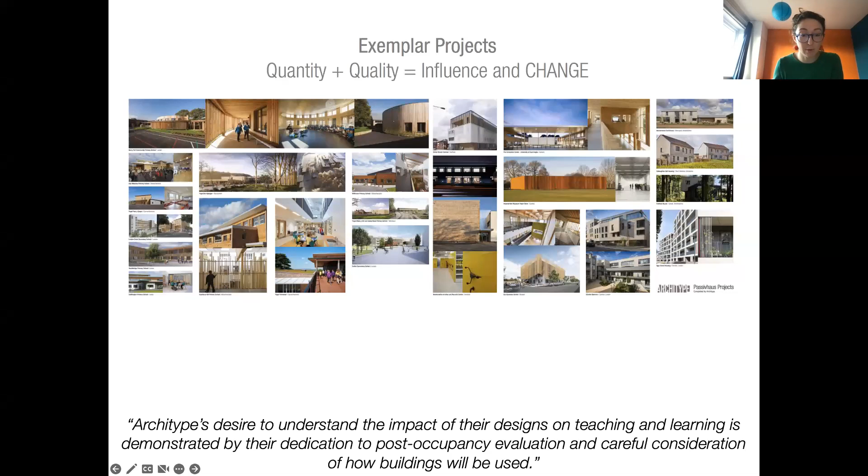So integrated design to us is about getting the basics right from day one, using an environmental approach from the outset, and thinking about the services and structural strategies from this early stage as well. Keeping it simple. If it's not simple, it's hard to build and to build right, harder to maintain, more costly, both in terms of money and also embodied carbon.

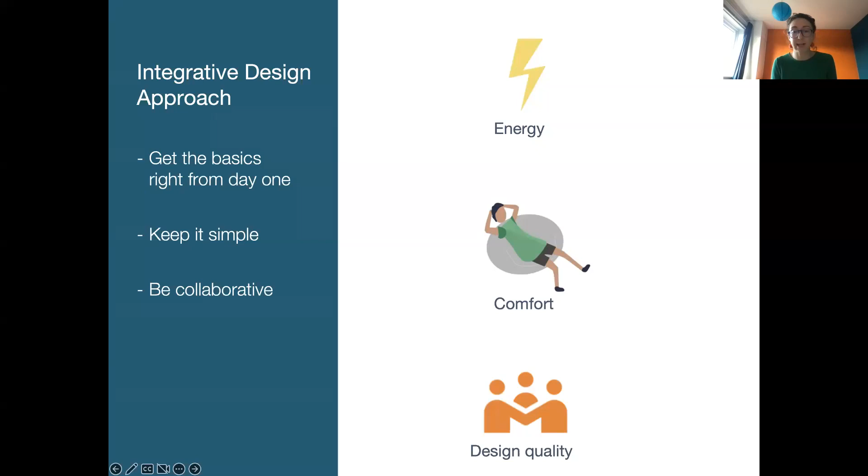And working collaboratively from the early stages with a good and experienced design team and contractor team is also really important. We don't feel that buildings are about any one company or person's ego, it's a team effort.

So just expanding on that comfort point slightly, as this is often something which is not necessarily always thought about, the comfort of occupants has a huge impact on how they experience a building. And as now people spend most of their time indoors, it can also have a huge impact on their health, which is why we think it's so important.

So by comfort, we're meaning air quality, including CO2 levels, particularly important in learning environments, the air temperature swings, overheating, as well as acoustics, moisture and mold control.

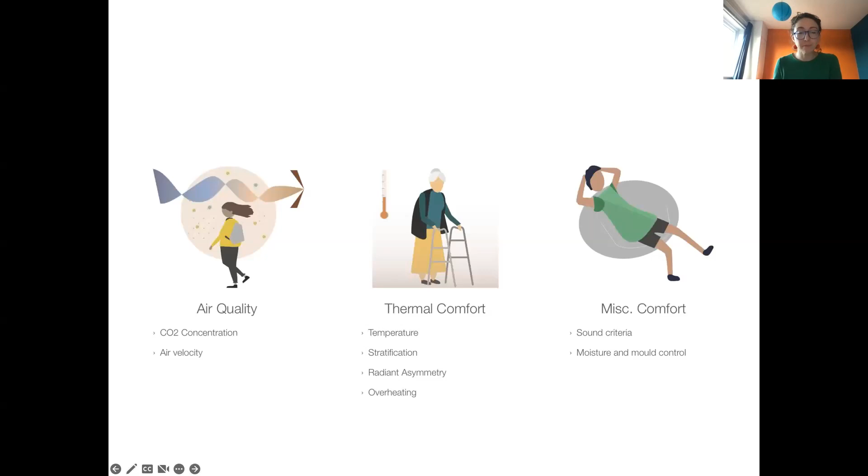So I'm going to talk briefly about the evolution of our design process at Architype. I don't know if you've all heard of the performance gap. So according to CIBSE, on average, buildings use 5 times as much total energy in reality than when predicted at design stage. In fact, that's up to 24 times the amount for heating. And that difference is called the performance gap.

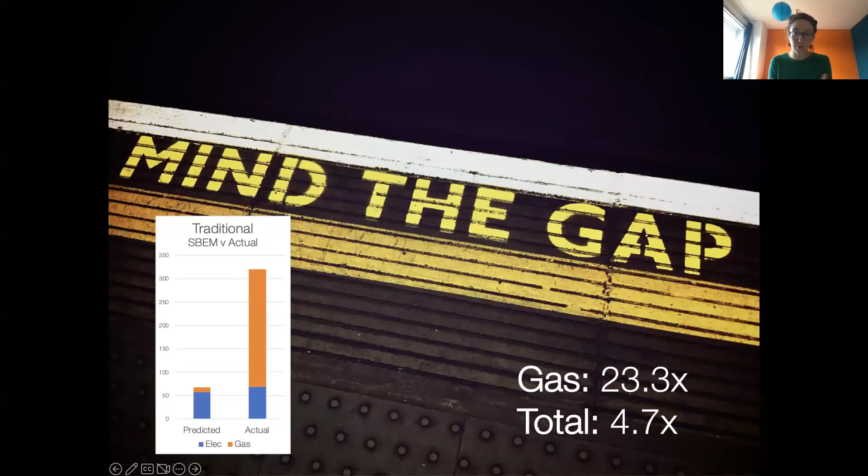So that's like buying a car that says it's going to do 60 miles per gallon and then it only does 12. So it's something that we think is not okay. So we seek to eliminate this gap in our buildings. We design buildings which don't use much energy, but then also give our clients buildings that actually perform as we promised during design. So to do this, we need to integrate this approach from the outset and carry it all the way through.

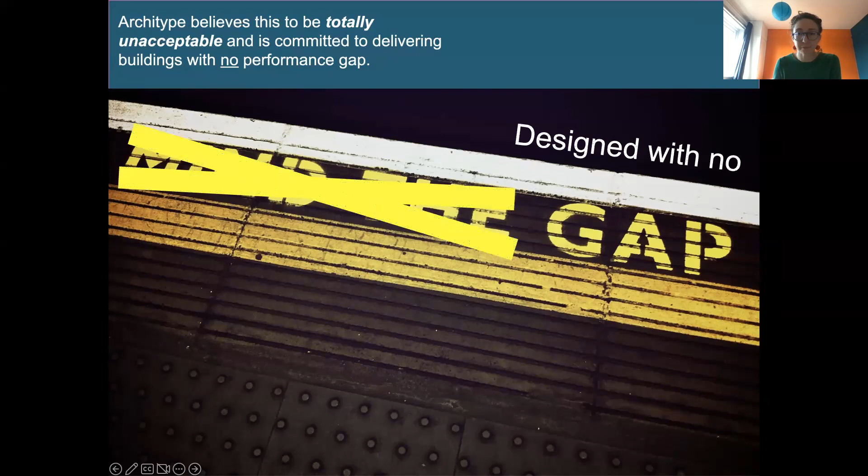So that's where Passivhaus comes in for us. In the past, we lived in quite simple buildings. These tend to be uncomfortable and use a lot of energy to keep them warm. But there's a tendency now for buildings, especially those claiming to be very eco, to sometimes be over-designed with a lot of tech, lots of automated systems, so complicated that sometimes you almost need a degree just to operate the building. And if it's not operated as designed, because it's too complicated, that's one thing that contributes to the performance gap. And you can still sometimes end up with an uncomfortable building, which perhaps is overheating.

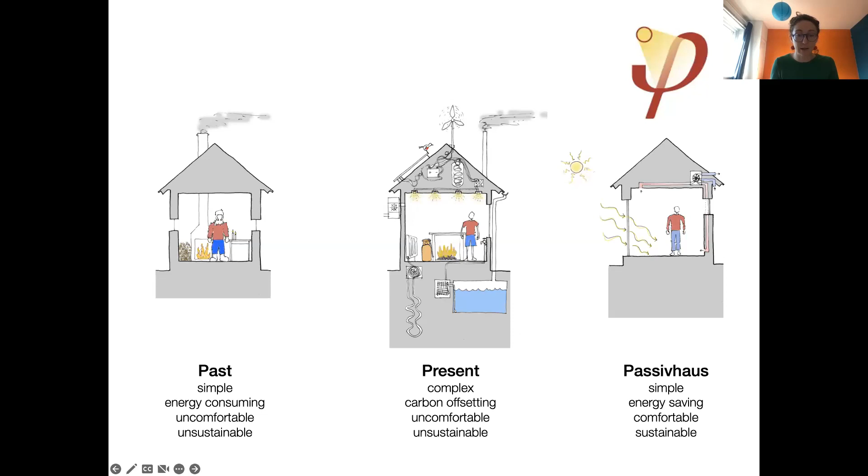So even we found through our work, even seemingly simple things like actuators, which automatically open windows, they can break. And when they do, it's quite expensive to replace them. And a simple window handle works pretty well. Everyone knows how to use it. It's easy and cheap to replace if it ever does break. So it's all about trying to make a building simple, easy to use, low energy, and comfortable.

So an example on that, in our school classrooms, we always put CO2 monitors in there. So instead of linking these to a BMS system, an automated system, which then links to the actuators to automatically open the windows if the CO2 is high, we now just link the CO2 monitor to this very simple traffic light system. So if the red light comes on, the teacher and the children know that they should open a window in the classroom to purge the CO2.

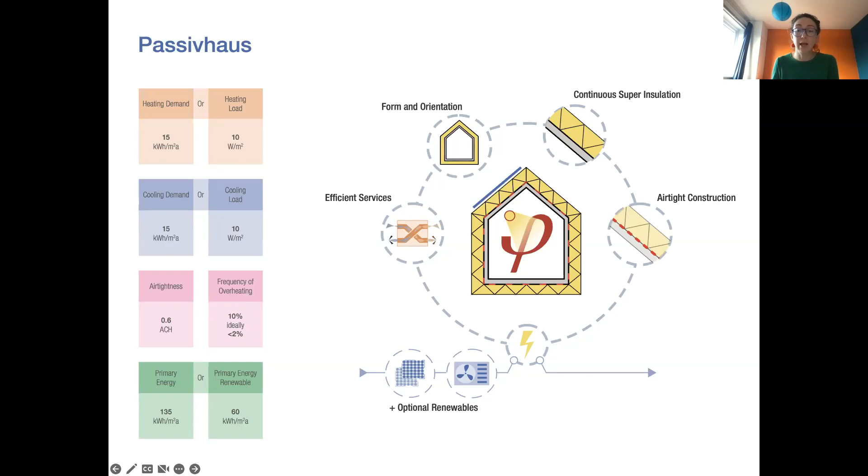So we see Passivhaus as the best tool currently available to guarantee approximately 75% reduction in heating energy compared to standard practice. So hopefully you all know what Passivhaus is, but if not, it's a really rigorous energy standard with set energy and comfort criteria, which you have to meet to gain the certification. And this is all accredited through a third party, which means there's nowhere to hide in both the design and construction process. And this again contributes to reducing the performance gap.

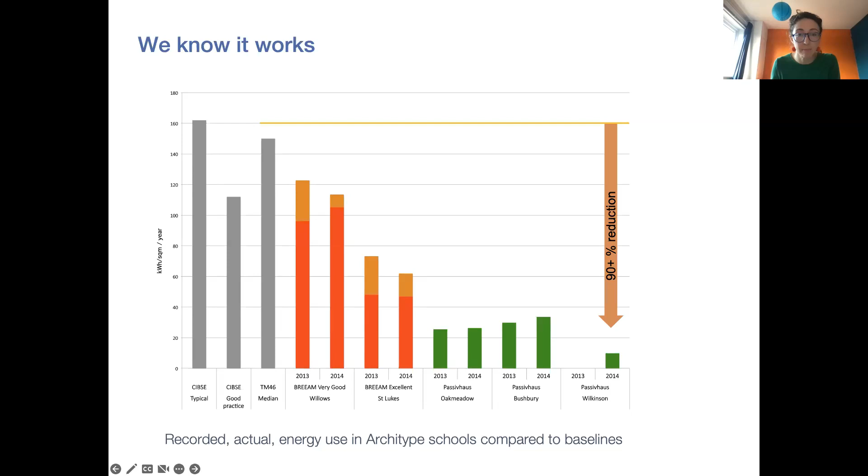And crucially, we know that it works because we've monitored our buildings. So the drop in heating energy here that you see going from red to green is when we started doing Passivhaus. And this was our second generation of Passivhaus once we'd learned a lot of lessons from the first. So that was a 90% reduction on school baselines at the time. We also monitor indoor air quality. And monitoring CO2 levels is a good proxy of overall indoor air quality.

I'll just quickly go through these graphs. This was the baseline case here showing CO2 and air quality in winter, which is when CO2 levels are at their worst because people aren't opening the windows. So baseline 1970s building here, you can see the CO2 is peaking very high at 5,000 parts per million, which is when your cognitive abilities can start to be impaired. So not good for a classroom.

The green line here is one of our pre-Passivhaus schools, so a slight improvement, but not getting down to where we want to be, which is about 1,000 parts per million, which our first generation Passivhaus school did achieve, and then second generation made an improvement on that.

Mainly things like what I just talked about with the actuators, making it a lot more simple. Now, the big difference you see between the Passivhaus schools and pre-Passivhaus in terms of the air quality here is because of the use of the MVHR, the mechanical ventilation heat recovery system. So that's constantly supplying fresh air into the classrooms, not relying on the occupants opening windows and getting cold.

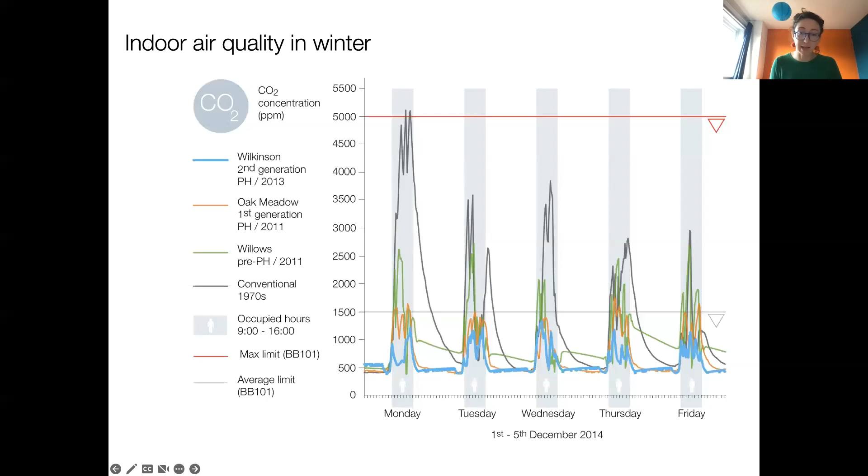So I'm just going to go through some considerations that we're taking into account when designing our low energy buildings. So this is about integrating environmental design from the start and Passivhaus. And some of these things sound quite simple, but are not always considered. So we look at the form of the building and often would calculate the form factor, which is the relationship between the external surface area of the building and internal floor area of initial design options, and compare these as a consideration. By having a simple form, you reduce the energy needed to heat the building in the first place, simply by there being less surface area for heat to escape through.

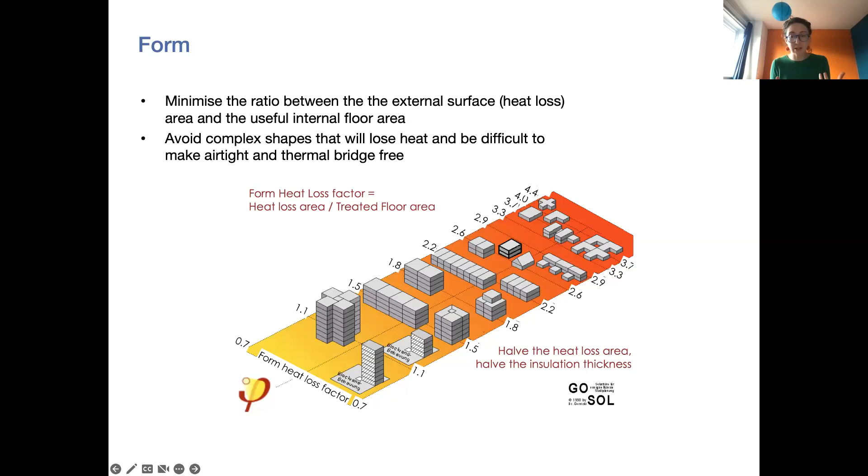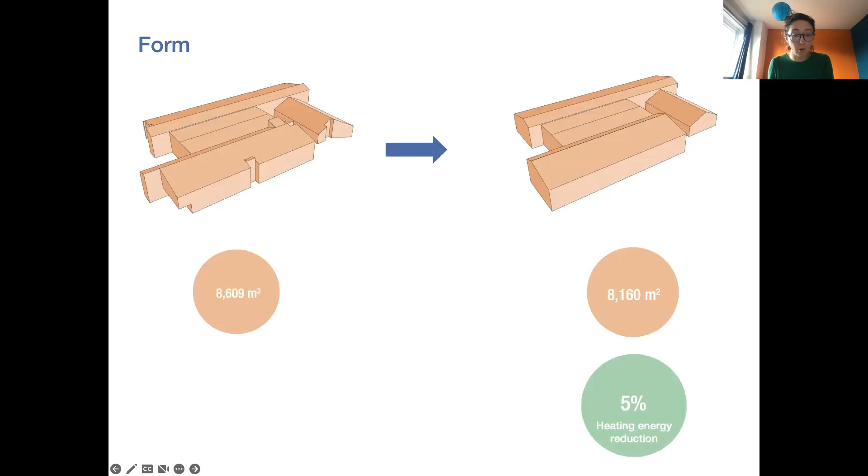And to highlight the impact of this, if you halve the external surface area of your building, you halve the insulation that you would need to achieve the same result. So I'm not saying we all need to just design boxes, but it's trying to avoid unnecessarily complex shapes, which are harder to make airtight, to build. But in this example here, just by taking some of those complex shapes out of the design, you instantly reduce the heating energy needed by 5%, save on area, making it cheaper and easier to build, and arguably creating a more elegant design. But sometimes simple forms can also be very beautiful.

So this is the Imperial War Museum paper store, one of our projects, which is literally just a box, but design quality is added through the facade detailing and use of materials. This building has one of the lowest air tightness in the world at 0.03. Interesting fact here, there's actually no insulation in the slab of this building, which is unusual for Passivhaus. Because it's an archive building, lower internal temperatures were required. And so we had no insulation in the slab to make use of the cool temperatures of the earth to keep the indoor temperature down.

So secondly, at early stage, we look at the orientation of a building, which is really important when trying to reduce energy use and controlling the indoor comfort. So one of our rules of thumb for early stage design is that a building's main glazed facade should ideally face south or within 15 degrees of that. So that dramatically helps to reduce the energy use by capturing solar gains from the sun in the winter. But it also makes it a lot easier to control those solar gains in summer to avoid overheating, as you can very effectively shade south-facing glazing with overhangs, which is much harder to do on the east and west, where the sun is much lower.

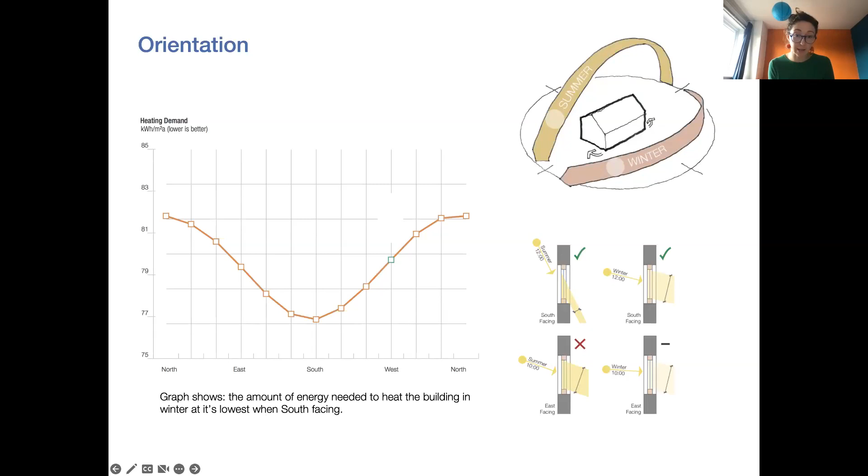So of course, this isn't always possible. That's an ideal situation, and other design factors may be more important, such as the relation to the street, the public realm, or you may be in a very constrained site. But the important thing is that this is something that we consider, and we know the implications of that, and then can mitigate any effects. So in a project example here from stage 2. So that's early stage design.

Our designs don't start with an abstract concept sketch, but by thinking about the form and orientation, as I just said, ventilation, daylighting, the site constraints, the internal accommodation, the relationship with the outdoors, and having lots of consultations with the stakeholders. This is a primary school project, so we looked at 5 massing options on the site. Option 4 was taken forwards. And even though we had some reservations about the deepness of the plan, this design was favoured by us and the client as it has the best form and orientation, and for maximising the green space on the rest of the site. We then designed a public plaza to the north of the site to engage the building with the local community, create a sense of civic presence.

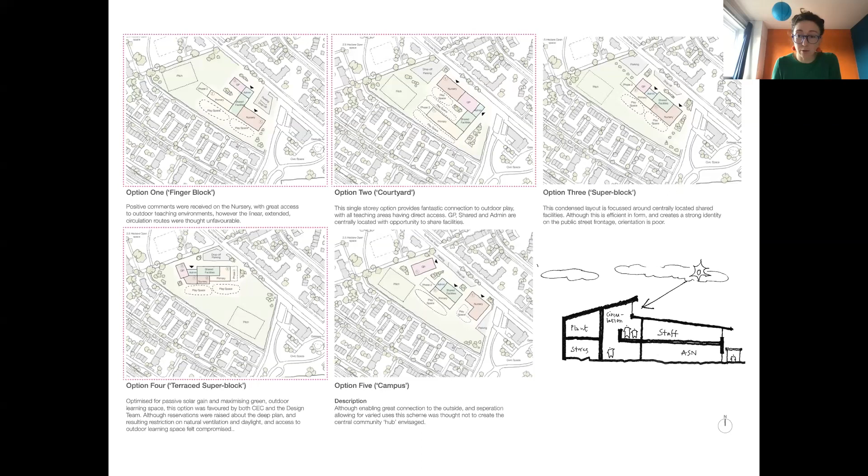The daylighting issue from the deep plan was remedied by introducing clerestory windows, like in this sketch, which bring the light down into the middle of the plan, reducing the need for artificial lighting. So this is an example of a very similar section on a different school that we completed in 2014. It's Wilkinson Primary School, one of our first Passivhaus schools.

So these two facades here have the same amount of glazing in terms of area, but they're arranged differently. The glazing on the top sketch there is vertical glazing going down to floor level. Low level glazing isn't contributing anything to daylighting because you want the daylight at desk level, not floor level, but it is adding to overheating.

It's harder to shade. The lower option, we've added shading if that was a south-facing elevation, and secure louvers for nighttime purge ventilation. And crucially, these need to be secure louvers so the occupants feel comfortable leaving them open at night. So it's all about having glass where you need it.

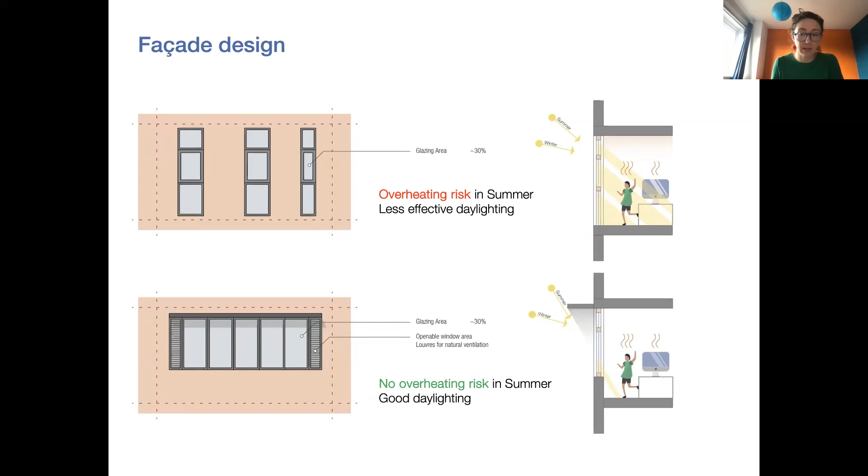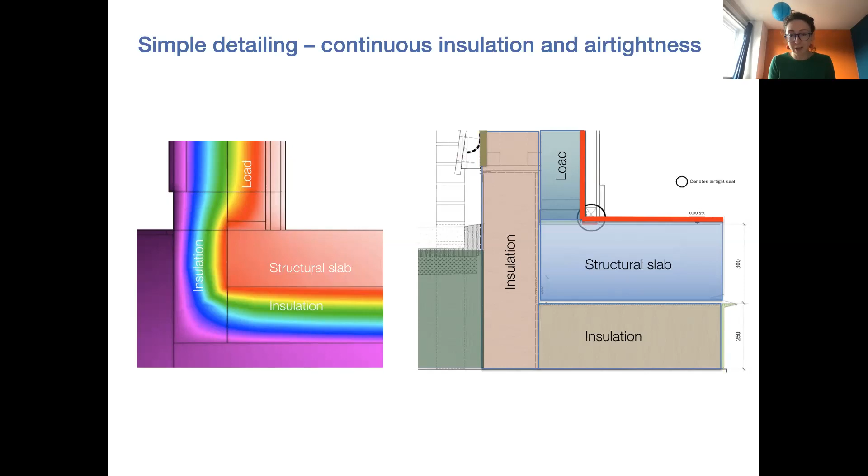So that means that all of that structure can be fully wrapped in insulation continuously. So this limits heat loss and also thermal bridging, so you don't get cold patches, which can cause condensation and mold growth, which again is bad for occupant health.

And again, with our detailing, we think about how this is actually going to be installed on site. Someone actually has to physically build from our details. And if they can't build it, then it's not going to happen as we want, and the building may end up underperforming.

So as an example here, this is a plan detail of the MVHR ducts coming in to terminate in what is basically an insulated window panel in the wall. The ducts need to be insulated for Passivhaus and then taped for airtightness and vapor control. The size of the ducts is coordinated with the mechanical engineer, and then we make sure that we allow enough room down the side of the duct so someone can get their hand in there to do that taping work.

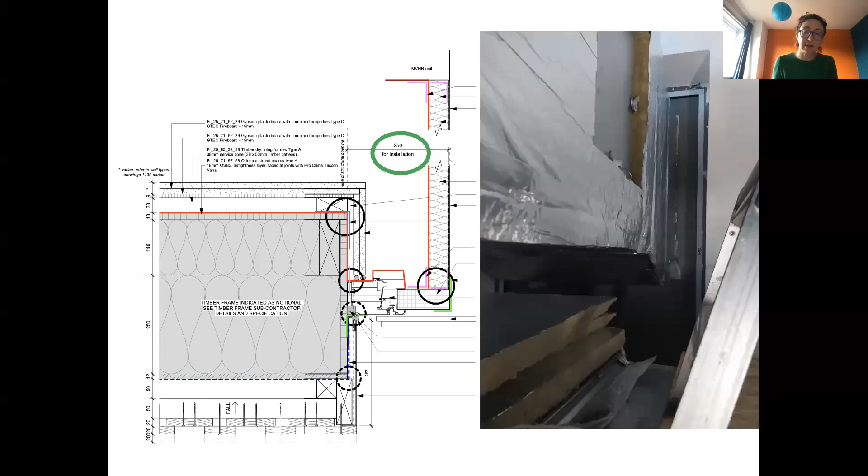And all this goes into developing all of our details. It's a slightly dodgy site photo, but hopefully that shows what I mean there. You can see that gap down the side of the duct and a ladder in the foreground.

So as I said, we work closely with services and structural engineers for our projects, right from the early design stages. This example is for a client who wanted a repeatable workspace building with high levels of user comfort and to meet Passivhaus energy standards.

So the starting point from the client was this donut-shaped building with our habitable spaces, office spaces around the outside of that. You can see here in green, and the circulation was around the inside of the courtyard. So our first move was to actually push that circulation space internally and bring the habitable rooms into the courtyard. So then they can be naturally lit rather than relying on artificial lighting so much. This also reduced the amount of circulation area.

We then pushed in the centre to create these 4 wings, which created shading for the highly glazed area around the entrance and further reduced the circulation area again. The client here placed a strong emphasis on integration and repeatability. So what these wings gave us was 4 identical T shapes, which make up the building, each with a stair and service core at the centre, which you can see illustrated on those 2 bottom sketches.

The orange boxes on the sketch on the right indicate the 4 MVHR units and mechanical ventilation system, which each serve one of those sections running vertically through the building. So doing it this way, rather than having, say, 1 unit per floor, instead split into 4 vertical, this allowed short distribution runs. So smaller ducts branching out from each of those zones. So that meant, in turn, smaller service voids, and so then we could bring the floor-to-floor construction height down.

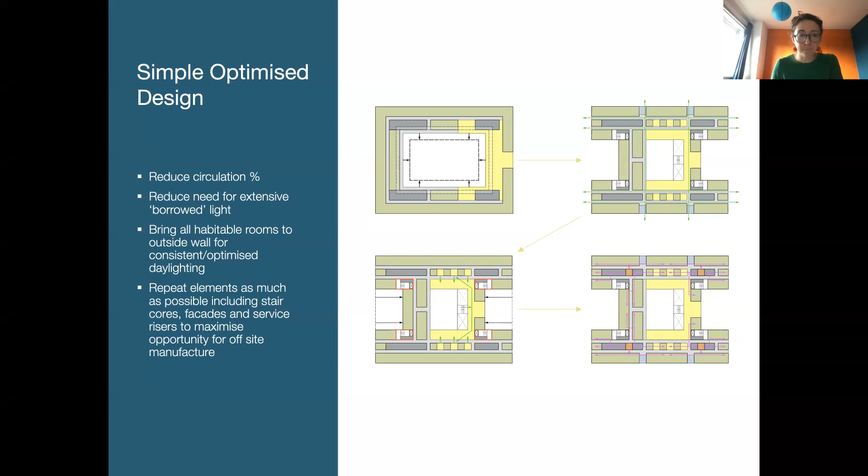So working with a structural engineer, this sort of grid system or tartan structural bay was proposed. By having this really rational grid system, the efficiency of the structure was much improved, by not having a completely bespoke system, complex junctions such as cantilevers, or additional structure having to pick up edges of voids and junctions like that. This rationalization reduces the amount of material needed in turn, which then brings down the embodied energy of the building, something that we're also very concerned about.

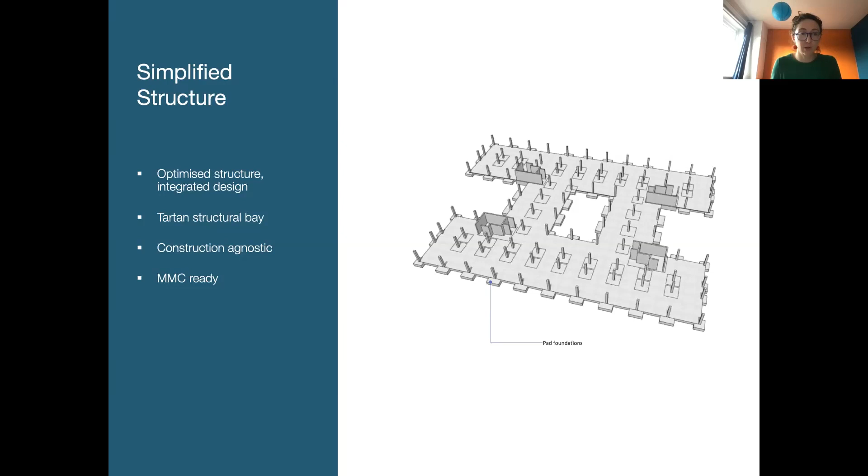It's also designed at an early stage to be construction agnostic, which means that it could work with different structural options at detailed design stage, like timber or concrete. So yeah, those are both examples of how we work with both the mechanical and structural engineers right from early concept stages.

And because of the high internal heat gains of this particular typology, some active cooling will be required in the building. So we're looking at using an activated concrete slab core as the low energy option of active cooling. So this involves piping cool water through the slab to take the heat out, which is gathered in the thermal mass of that concrete slab.

So interestingly, this is cool water, not chilled water. It's about 18 degrees, so we're not using more energy to cool the water down, and it could potentially just come straight from the mains. And using chilled water could actually create more condensation risk. And this piped water system could also be used as heating during the winter months.

And along with that, we're also looking at not fully insulating the ground floor slab, like we did with the paper store, so using the mass of the ground to cool and stabilize the internal temperatures. So that's a passive example, passive design.

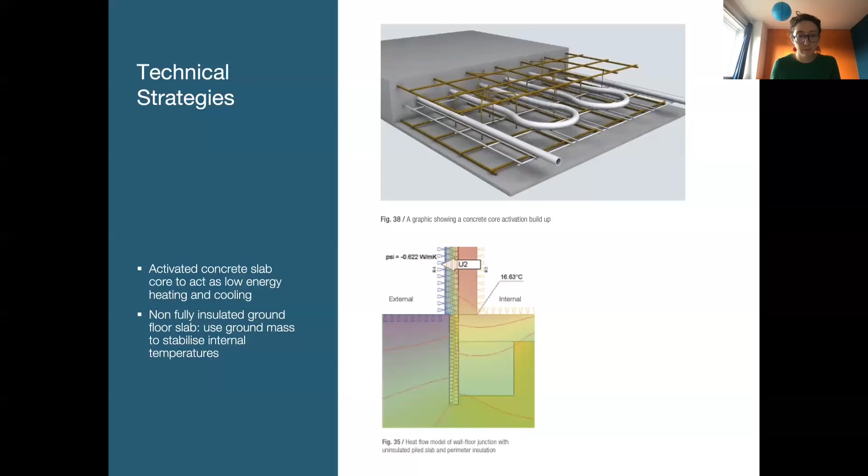So on some of our projects, our clients are now asking us to look at integrating climate resilience into our designs. So for this, the Passivhaus supported living apartment block for Exeter Council, the building was modelled using 2050 and 2080 climate data by the services engineers on the project. It was taking the 50th percentile of future climate options. So that's a prediction of what will happen sort of halfway between doing nothing at all to prevent climate change and achieving the best case 1.5 degree scenario.

So we knew that the building would overheat in 2050 and beyond. So we used the test data to test various interventions that would help reduce the overheating in the future. And then we allowed for these interventions to be added into our current design now. So hooks were installed in the window reveals so that external shutters could be added in the future. So they're not there now, but the provision for them is.

So those shutters would block out the solar gain during peak summer. So you can see from this graph that that's not enough in 2080. So shutters are the second line down in blue. So it also allowed for concrete pads on the roof at this stage, so that a cooling unit could be added to the ventilation system in the future once it was required. And that again brought down the overheating significantly.

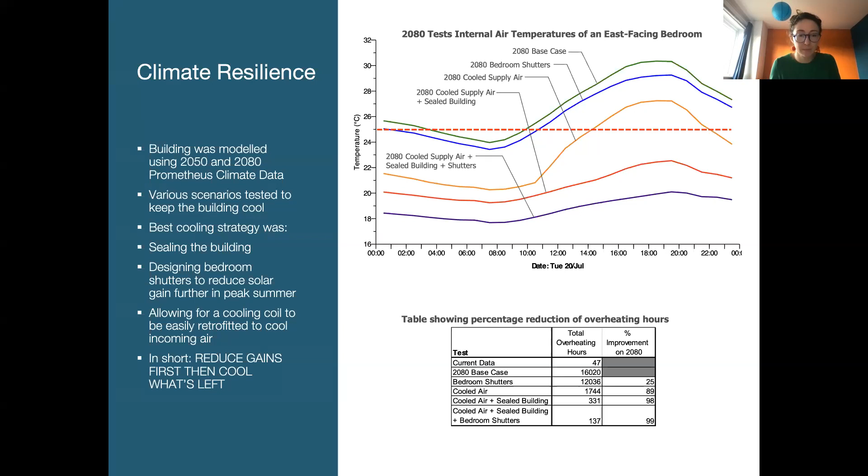So as well as working collaboratively with the design team throughout, we try to foster the same ethos with the contractor team. We've designed the building, but the people on site don't necessarily know what the overall project goals are, Passivhaus, for instance. So when doing Passivhaus projects, when a very high site quality is required and a very stringent air tightness result of 0.6 air changes, it's not just the site manager on site who needs to understand this, but all of the subcontractors. And education is really important for getting this understanding and making people engage with the scheme more. So it takes a little bit of a different way of working.

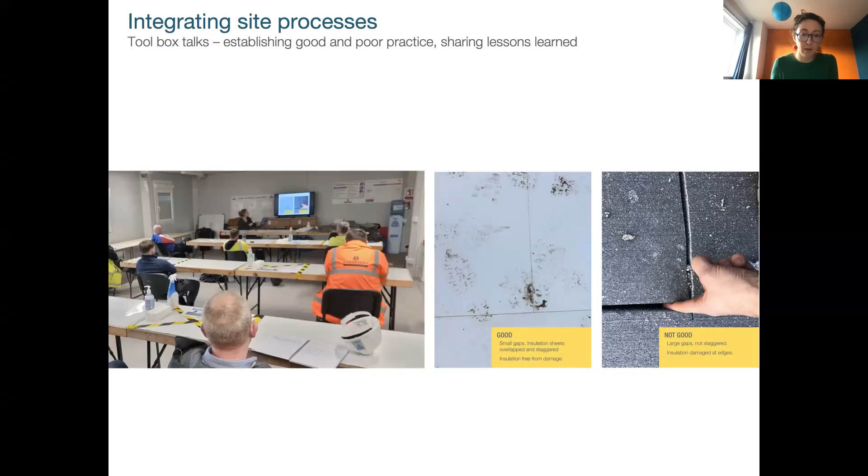The services team can't come in and punch holes in the building without considering the air tightness, for example. So it's a much more joined up approach between the different subcontractors on site than you might normally have. So we run toolbox talks like shown in this picture with the different site teams and give examples of good and bad installation and services, and share lessons that we've learned on previous Passivhaus projects. On a project recently, every penetration that went through the building was labelled with either a QR code or a number, so then the air tightness sealing of that could be kept track of on site and evidenced to the Passivhaus certifier.

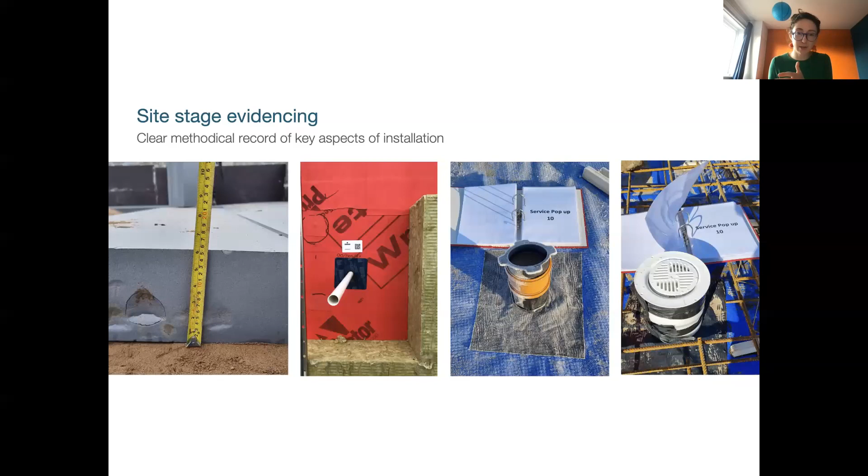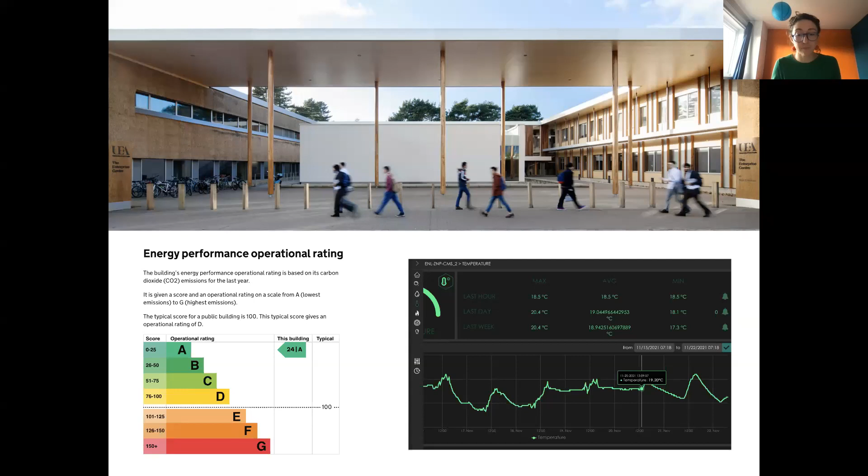And also, just to end on, there are a lot of challenges in the industry at the moment and in the world, but encouragingly, the momentum for change just seems to be building, and that's seen in the construction industry shifting towards more low energy buildings which address the current climate crisis. So I'd say it is a really exciting time for students to be moving into the industry, and many councils and organisations recently declared climate emergencies and are coming to us looking for passive house and zero carbon buildings.

Hopefully you all saw in the recent news that the Scottish Government is planning on bringing in legislation in two years' time that all new build housing will need to be passive house standard or Scottish equivalent. So that's really exciting, and hopefully the rest of the UK will follow, and this will extend into all new buildings.